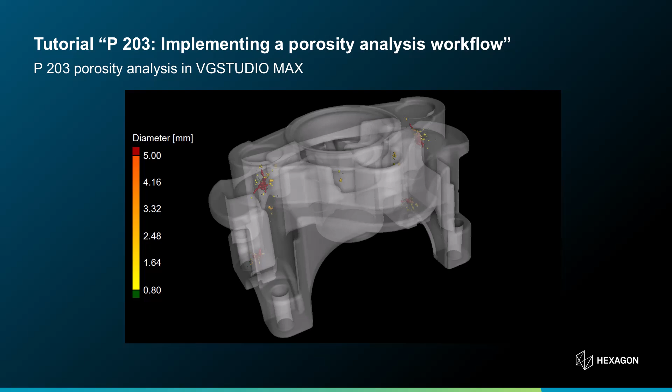In this video, you're going to learn how to create test regions for porosity inspection in VGSTUDIO MAX. In the first of our 3 tutorials on P203, I showed you how to perform a porosity inspection on a pump bracket. I examined and toleranced the pump bracket as a whole, as well as 4 functionally relevant test regions on that pump bracket. To keep the tutorial simple, I had created the test regions beforehand and imported them by means of a template into my project.

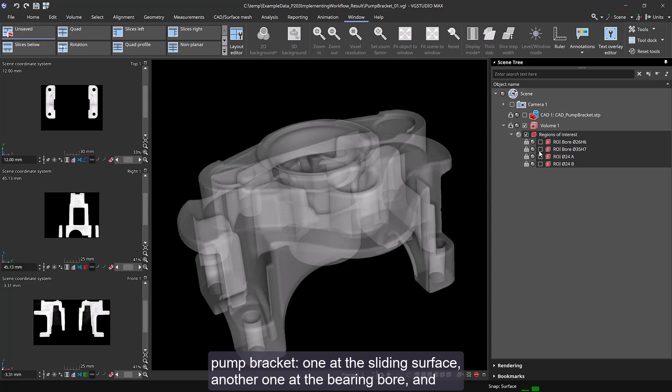Today, you will learn how to create the test regions on your own. So what we're going to do in this tutorial is create the 4 test regions of the pump bracket: one at the sliding surface, another one at the bearing bore, and one at each of the 2 half shells. To do so, we'll work with the CAD model of the pump bracket.

We'll select the region we're interested in, specify a thickness for testing, and copy and paste the test region from the CAD model to the volume. Once I've created the test regions, I will show you how to save them in a template and how to import the template into a new project.

Okay, now that we've seen what we're up to, I'd say we get started. I'll open VGSTUDIO MAX and, on the Welcome page, select the Porosity tab. This way, I have all controls for porosity analysis conveniently in one place.

To load the VGL file into the scene, I'll select File, Open, and browse for the VGL file. The data will be loaded into the scene.

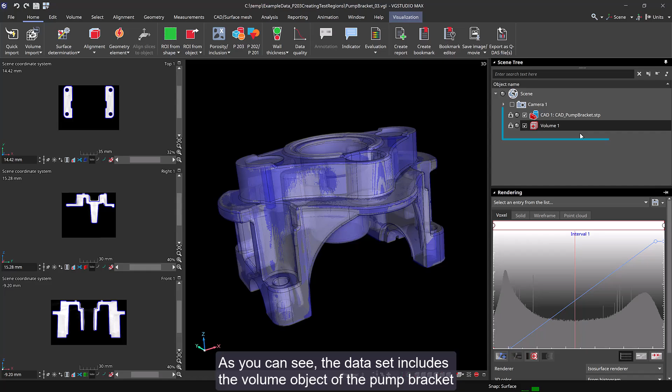As you can see, the dataset includes the volume object of the pump bracket and the corresponding CAD model. And very important, the volume has been aligned against the CAD model. This alignment is necessary to make sure that the test regions that we are going to create on the CAD model will fit perfectly on the volume.

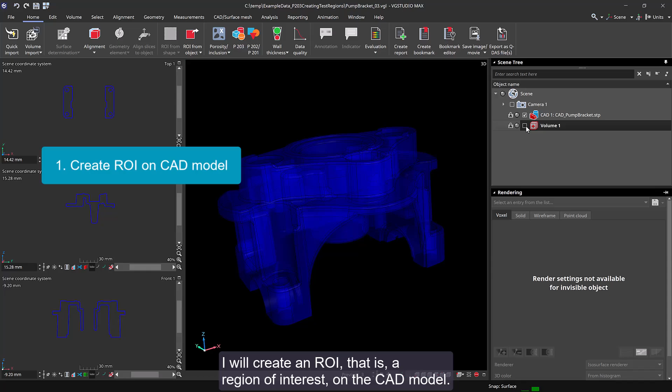Since I'll be working with the CAD model, let's switch off the volume for now. To create the test regions, I will create an ROI, that is, a region of interest, on the CAD model. Then I'll copy and paste the ROI to the volume. And finally, I'll give the ROI a color and a name.

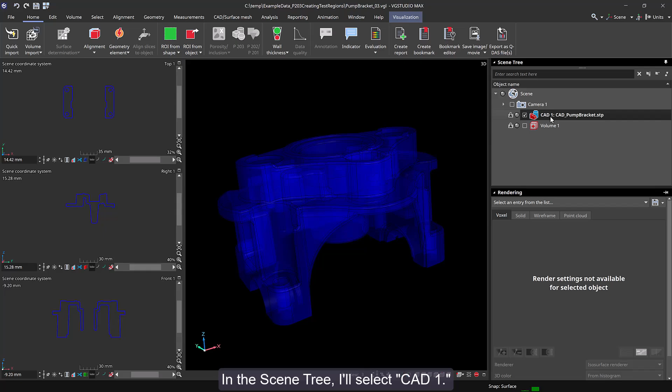Okay, let's start with the first test region, which is located at the sliding surface of the pump bracket and has a thickness for testing of 1 mm. In the scene tree, I'll select CAD 1. On the Home tab, I'll select ROI from Object, ROI from CAD Selection.

Now I'm going to select the location of the test region. To do so, I'll go to the 3D window, and while holding down the Control key, I'll click to select the region I am interested in. Now I need this dialog here. In the ROI thickness field, I'll specify a thickness for testing of 1 mm.

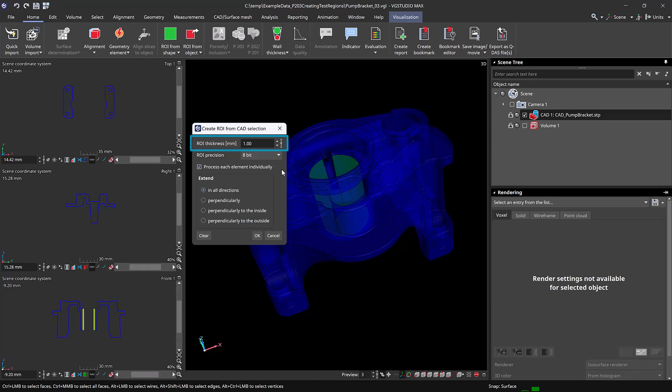Next, I'll select Extend Perpendicularly to the Inside, so that the region I am going to create will be extended to the inside of my volume. And that's all I have to do here. I'll click OK. And as you can see in the scene tree, I have created an ROI on the CAD model.

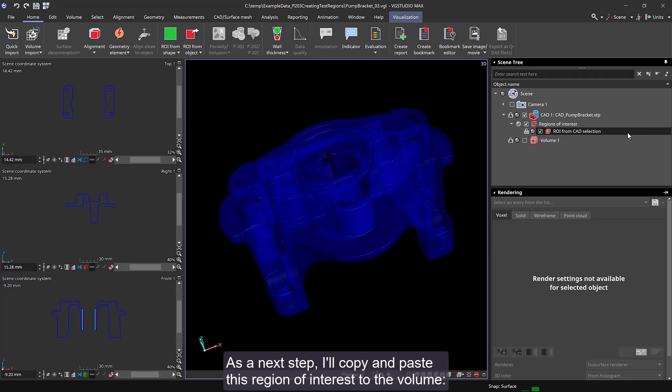As a next step, I'll copy and paste this region of interest to the volume. In the scene tree, I'll select the region of interest and press Ctrl+C. Then I'll select the volume and press Ctrl+V. The ROI is now on the volume. So, let's make the volume visible and the CAD model invisible.

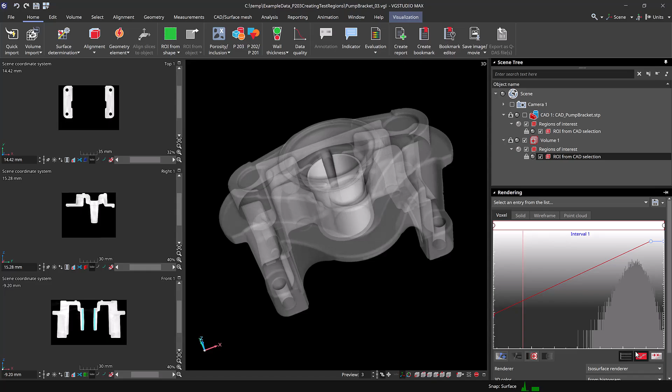Now I'll give the ROI a color and rename it. I'll select the ROI. In the Rendering tool, I'll activate the render settings for the selected ROI. Then I'll double-click the color bar here. I'll select a color and click OK. And here it is, the test region at the sliding surface of the pump bracket.

Finally, I'll select the test region in the scene tree, press F2 and give it a name that allows me to easily identify it. And I'm done. As you can see, creating test regions in VGSTUDIO MAX is done with a few clicks.

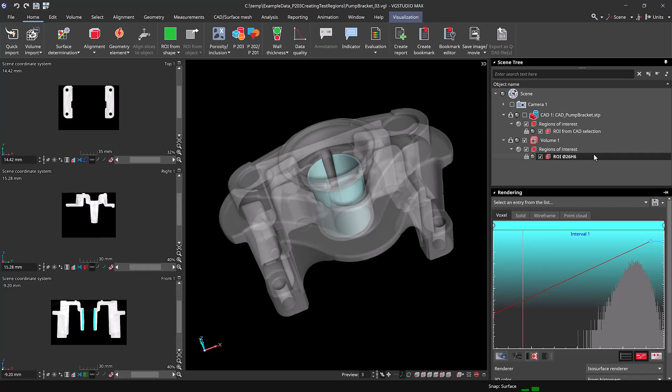Off we go to the next test region, the one at the bearing bore. First, I'll make the volume invisible and the CAD model visible, so that I can work conveniently on the CAD model. Then I'll select the CAD model.

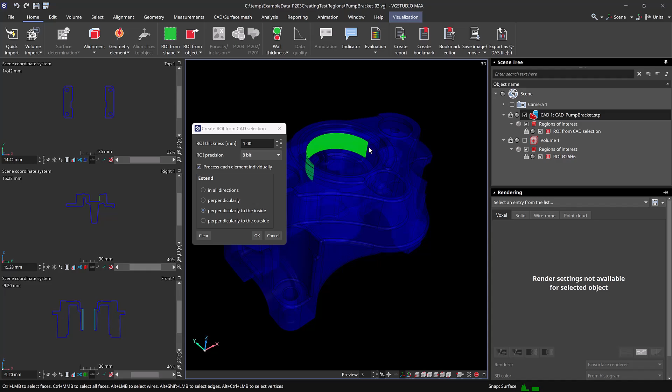And I'll open the Create ROI from CAD Selection dialog via ROI from Object, ROI from CAD selection. I'll select the location of the test region. Now look here. The second test region consists of 2 CAD model elements. No problem, I'll simply select both elements.

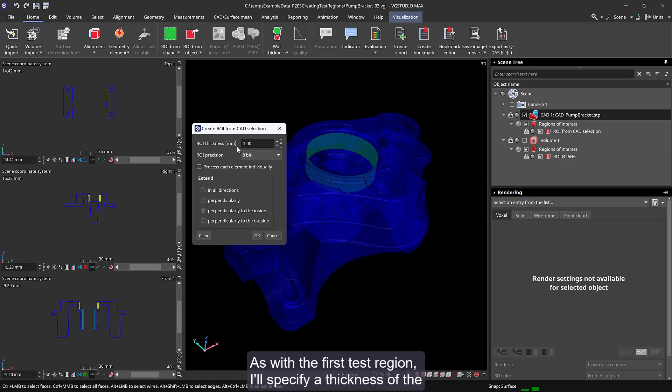What's important now is that process each element individually is not activated. This way, the 2 elements on the CAD model will be combined to one ROI. As with the first test region, I'll specify a thickness of the test region of 1 mm. And I'll check that extend perpendicularly to the inside is selected. Then I'll click OK.

And in the scene tree, I can see a second ROI under the CAD model. Let's bring the ROI onto the volume and give it a color and a name. I'll copy and paste the ROI to the volume.

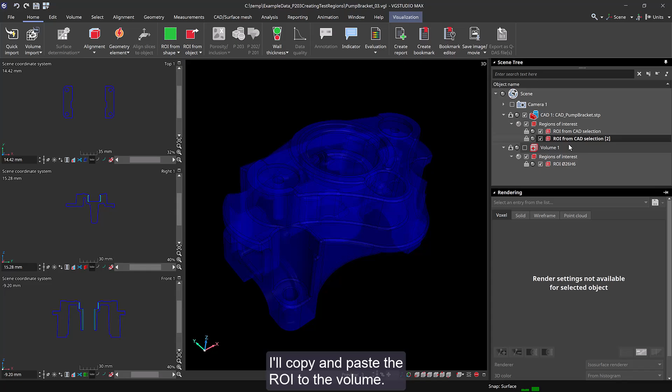Make the volume visible and the CAD model invisible. I'll select the ROI under the volume, activate the render settings, and give the ROI a color. And finally, a name.

And here it is, the test region at the bearing bore of the pump bracket. We've created 2 of our 4 test regions. Off we go to the 2 remaining test regions at the half shells of the pump bracket.

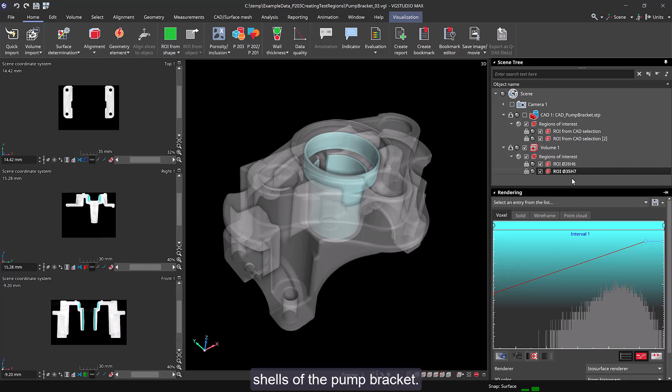The 2 regions have the same thickness for testing, so I can save time by creating them in one go. Again, I'll start by making the volume invisible and the CAD model visible. Then I'll select the CAD model and open the ROI from CAD selection dialog. In the 3D window, I'll select the 2 elements on the CAD model, and I'll specify a thickness of 3 mm.

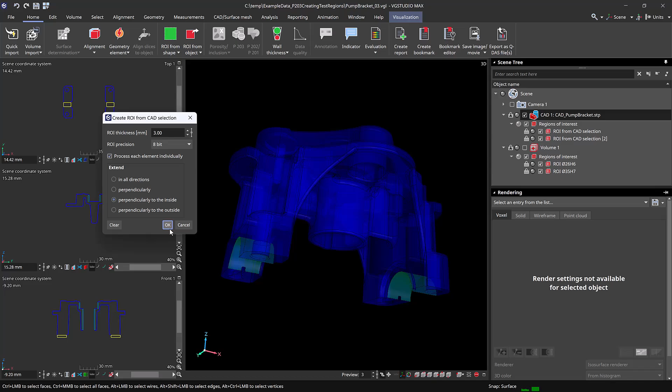Now, this time, I have to make sure that process each element individually is activated. As before, I'll make sure that the regions extend to the inside of the volume, and I'll click OK. And in the scene tree, 2 additional ROIs are displayed under the CAD model.

I'll copy and paste the ROIs to the volume. Make the volume visible and the CAD model invisible. Then I'll give each of the ROIs a color and a name.

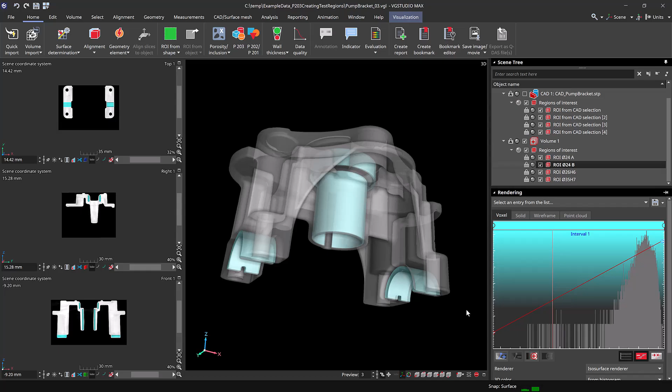And here it is, the pump bracket volume with its 4 test regions. Now that I have created all the test regions, let's see how I can save them in a template that I can later import into my projects.

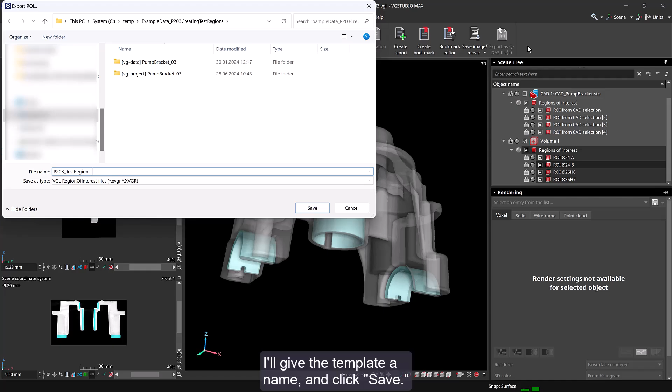In the scene tree, below Volume 1, I'll select all the ROIs I want to include in my template. Then I'll right-click and select Export, ROI Templates. I'll give the template a name and click Save.

If I want, I can add some information here. Then I'll click Save again, and the template will be saved in the specified location. We've got our template, well done.

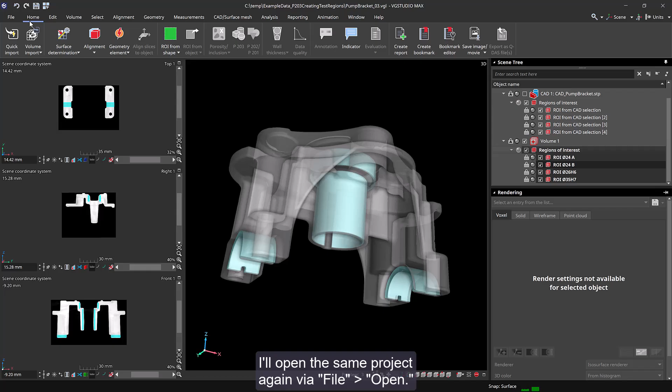To round this tutorial up, let's take a quick look at how to import the template into a new project. I'll open the same project again via File, Open. I don't want to save the current project, so I'll click No here. And here we go.

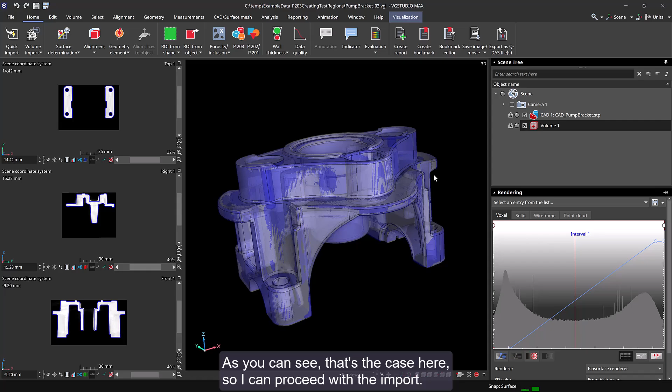Importing the template is a piece of cake. But as I mentioned before, I have to make sure that the volume object has been aligned to the CAD model that was used to create the test regions. As you can see, that's the case here, so I can proceed with the import.

I won't need the CAD model, so let's make it invisible. In the scene tree, I'll right-click Volume 1, select Import, ROI Templates, and browse for the template. In the Import dialog, I'll check that all regions I want to import are selected. Then I'll click Import.

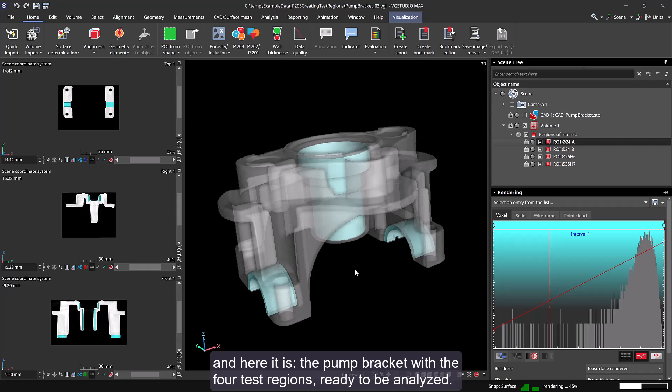And here it is, the pump bracket with the 4 test regions ready to be analyzed.

And that's it. As you've seen, creating test regions is intuitive and done with a few clicks. All you have to do is select the region you're interested in on the CAD model and copy the region to the volume.

When you're done, save the test regions in a template that you can later import into your projects. And remember, before importing the test regions into any project, make sure that the volume has been aligned to the CAD model that was used to create the test regions.

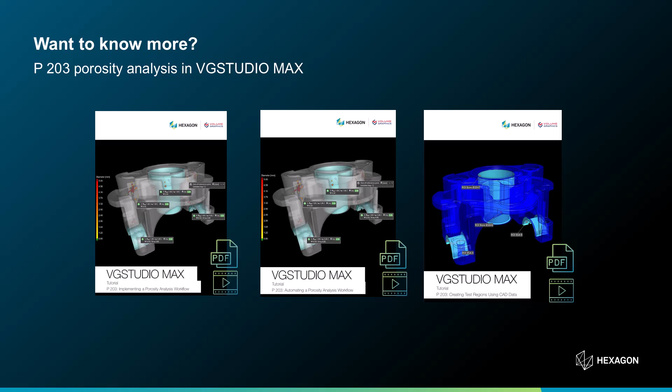This was the third of our 3 tutorials on P203 porosity analysis in VGSTUDIO MAX. If you want to dive deeper into the topic, make sure to check out these tutorials.

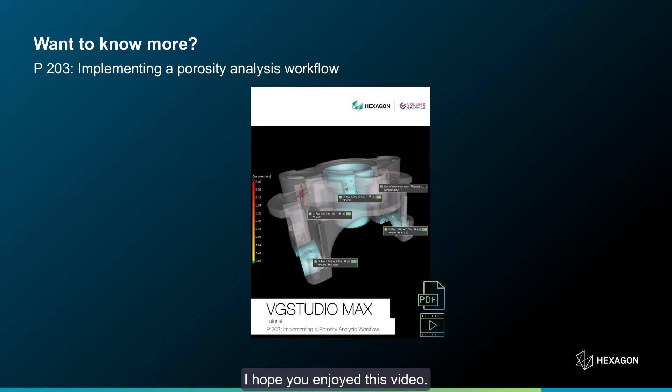In our tutorial P203, Implementing a Porosity Analysis Workflow, you'll learn how to set up a workflow for a porosity analysis step by step. And with our tutorial P203, Automating a Porosity Analysis Workflow, you'll learn how to speed up inspection processes in foundries by automating your inspection workflows.

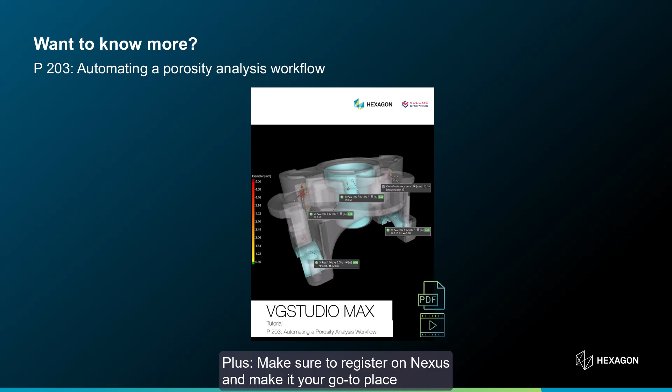And finally, you'll find the PDF version of this video tutorial if you want to try it out on your own.